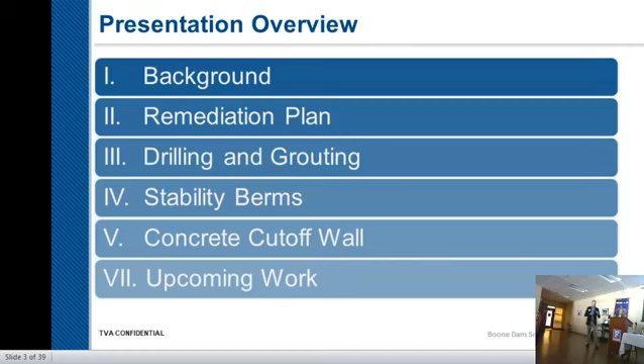Most people are familiar with the dam. We have a concrete and an earthen embankment section. The earthen embankment is about 750 feet long. The concrete section is about 850 feet long. The normal pool in the summer is 1,382 feet. The normal winter pool is 1,362 feet, and our tail race elevation is around 1,360 to 1,362, depending on when we're generating and how many units are running.

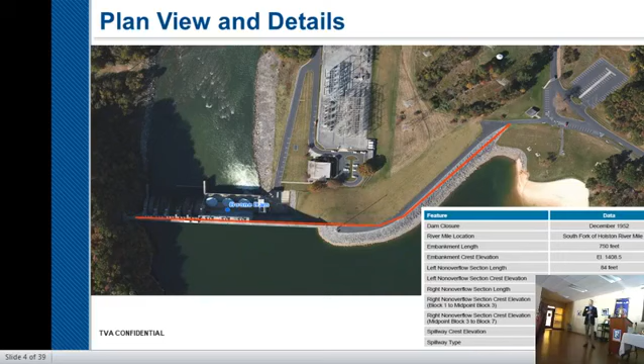So normally we have about 100 to 120 feet of head, 120 feet of water behind the dam that's impounded in the reservoir. It's a typical earthen embankment section. Our seepage issues that we're dealing with are with the embankment section. The concrete section is stable. We don't have any seepage issues over there.

This is a pretty typical embankment section for the time that this was designed and built. A lot of the Corps of Engineers facilities and other dam facilities were built with this same configuration at the same time. And as you are aware, the projects like Center Hill and Wolf Creek have been fighting the exact same issues that we are, and we're going to talk about that over the next couple of slides. The original designers of the dam understood what was going on at the dam, but this seepage and piping problem was not well understood in the industry. That's why you see it as a broad problem with dams these days.

It's the number two cause of dam failures worldwide. And when I say number two cause, it's only 0.1% less than overtopping of dams. So it's a significant issue in the industry.

So we have an earthen embankment section, and they understood that there were these pinnacles of bedrock underneath the dam that we're going to see in some of these pictures. But again, they didn't appreciate how that impacted the dam long term from a seepage and piping standpoint. They looked at it as more of a structural problem, and so we did a consolidation grouting program under the dam to essentially, in their mind, construct vertical columns to help support this load of the embankment.

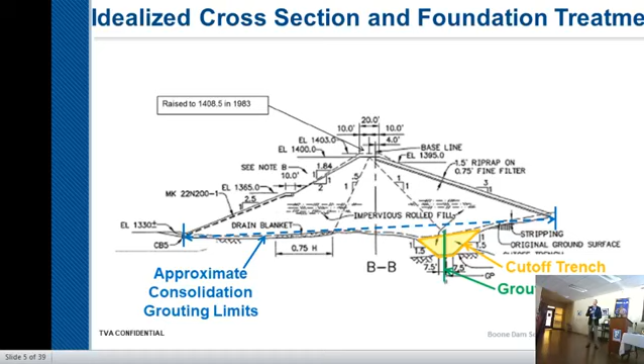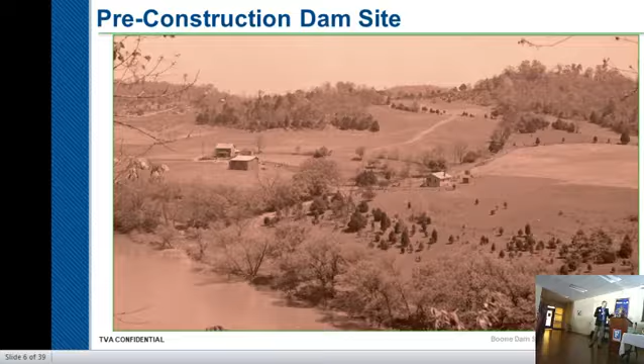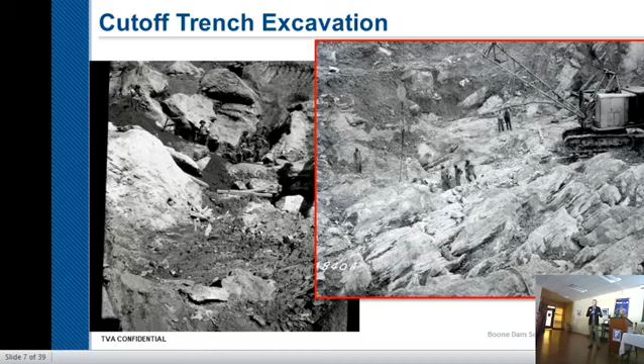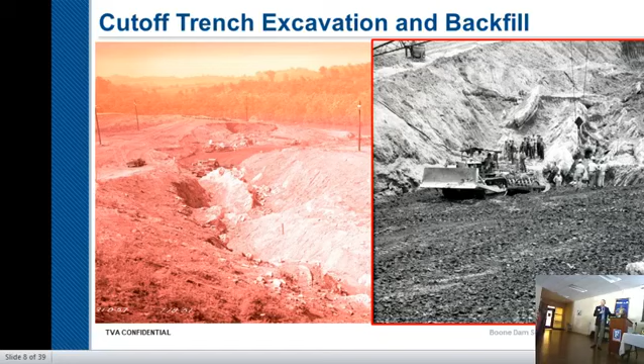This is a big pinnacle of rock. You can see back here in this part of the cutoff trench, they had gotten above those pinnacles and they're using equipment to compact material. But you can see as you come up the hill, we have these fins of rock still sticking out that they had to compact material around. And then here, you can see they're getting above the rock, so you're getting into normal construction practices, pretty much what you would see us doing today.

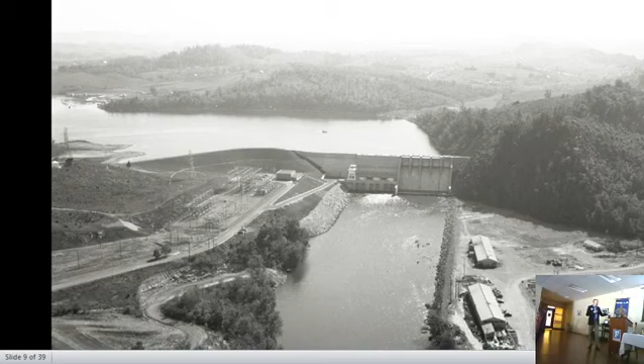So at the end, you can see we've got the lake impounded. You can still see some of the construction facilities, the switch yards in place, the control building, and the powerhouse. So you have the reservoir impounded behind the dam, and it's constantly trying to seep under the dam through that earthen cutoff trench. But remember that historic photograph, all those drainage swales, surface swales, used to come back this direction too. So not only do you have the seepage from the reservoir, you have the seepage from this high ground and these sinkholes up on the hills here that are also directed that direction.

As you can imagine, as we operated the reservoir over the last 62 years, we fluctuated it up and down. During the summer, water level in the lake is high, and everything wants to run downstream. Water level goes down in the wintertime, and a lot of that water from the lake still tries to run downstream, but a lot of the water up in this high ground also wants to run upstream under the dam. So you kind of have this shifting of the water back and forth as we operate the reservoir.

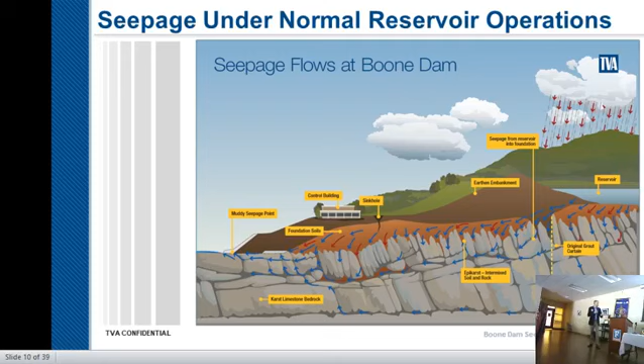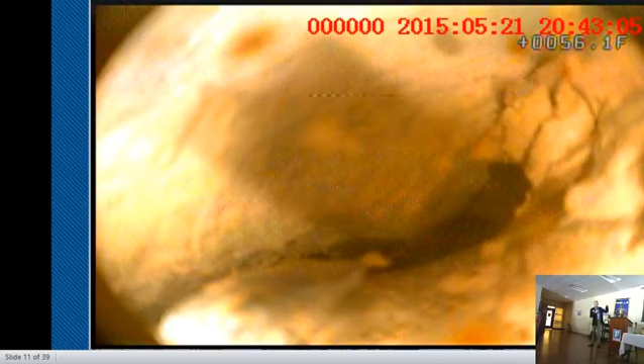This is actually a video from the abutment. It's not under the dam, but this is physically what's been occurring over 62 years. We drilled a hole, put a camera down on the ground, turned the camera sideways, and you can see water flowing, and those are pieces of soil. One piece of soil at a time.

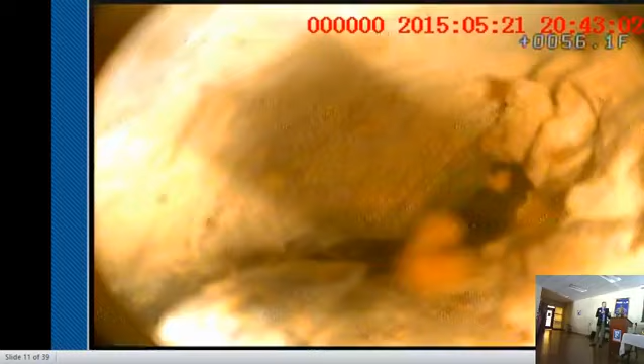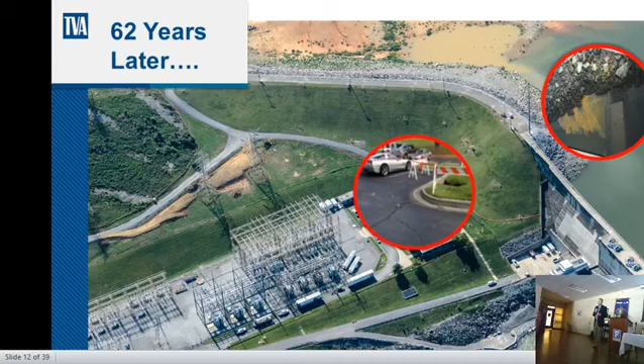So 62 years later, we have a sinkhole in the parking lot at the downstream toe of the dam, and you have muddy discharge in the tail race. Now sinkholes aren't common, but they're not uncommon at dams. Infrastructure fails all the time.

You'll have old toe drains, you'll have storm drainage. I've responded to probably 100 sinkholes in my career. 90 of them have been associated with storm drains that have failed over time. But when you get a combination of the sinkhole and the muddy discharge, it is an emergent situation. And that's why TVA made the prudent decision to lower the reservoir at the time, and as quickly as they did.

Here's some closer pictures to help you understand the scale. This hole doesn't look very big — it's about 5 feet this direction, 3 feet this direction. But over time, while that hole never got bigger, about a 40-foot diameter around it depressed. So that's part of the early work we did — coming in to do some grouting and create structural columns around that sinkhole to keep it from impacting the control building and other infrastructure.

Oh. I'm getting a little handsy here apparently.

For some scale, there's a man standing in the picture up there. His name's Tim Boring — he's about 6'6", 300 pounds. So to put things in scale, that's not a little muddy discharge.

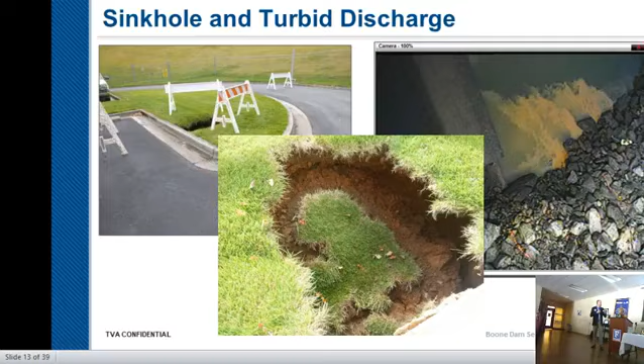As we've talked about in the past, our overall seepage remediation plan is to build a concrete cutoff wall, plus grouting and berms. The reason we built a concrete cutoff wall is you know what you built and where you built it — it's a positive cutoff, a permanent cutoff in terms of deterioration. You essentially turn the embankment portion of the dam into a concrete dam. From that point forward, the concrete barrier wall is the seepage barrier, and the embankment just serves to keep it stable.

Because of modern design standards and the potential for future sinkholes upstream and downstream of the dam, and because we can't impact the regional groundwater table, we've also added stability berms — rock berms upstream and downstream — designed to keep the dam stable. If we have sinkholes anywhere near the toe of the dam, they're designed to collapse in and choke them off. And then the grouting is to provide more of a positive cutoff below the wall.

So you say, well, why don't you just build a cutoff wall to the bottom and not worry about grouting? Well, a couple things. You have to slow the water down so that you can build the cutoff wall in the first place. And secondly, it's just more economical — it's cheaper and faster than excavating all that rock and backfilling it with concrete. So it's really trying to balance and optimize the depth of your wall, building it where you need it with some additional margin rather than building it full depth.

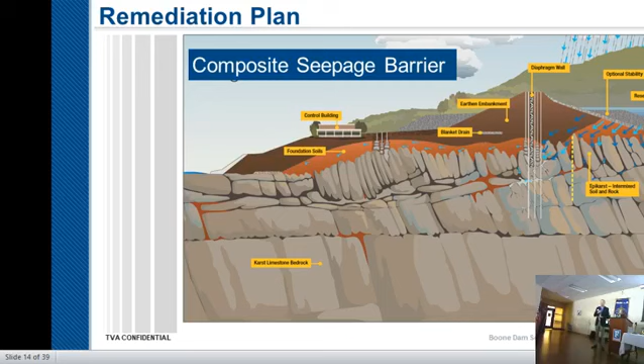So when I was here in November 2016, we were in the middle of our drilling and grouting program. There were two components. There was a low mobility grouting program, done in the upper part of the rock around these pinnacles — like injecting a brick mortar, something sandy, made of cement, water, and sand. It's made to push soft soils out of the way, fill larger voids and cavities, and displace the soft soils that are prone to erode. And then the high mobility program, injecting cement and water and other components that vary in thickness from milk to a milkshake, whose job is to penetrate the finer features in the rock and seal those up.

So we worked about 14 months, 24 hours a day, 6 days a week, through all the weather. The only thing that really shut us down was lightning. We took Christmas Day off, and the 4th of July and Memorial Day — major holidays — but other than that it was an around-the-clock operation, and Sundays were mostly for equipment maintenance.

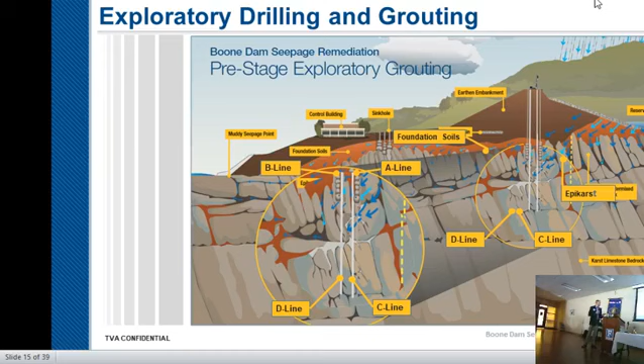In all, we drilled 539 low mobility grout holes, 276 high mobility grout holes, about 21 miles of drilling, and we put about 233 concrete trucks of grout into the ground below the dam.

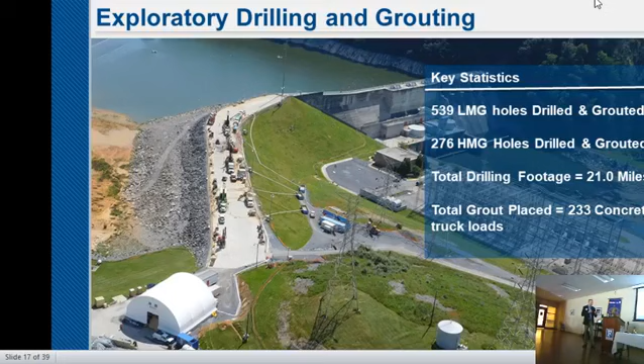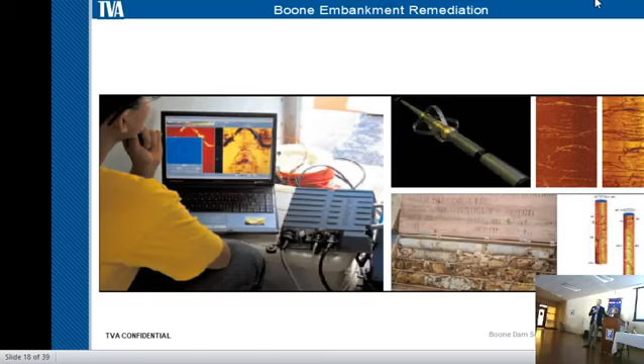Every one of those holes we drilled was as much about collecting data and optimizing the depth of this cutoff wall as it was about getting the grout in the ground to serve the other purposes. We made direct observations of the material we recovered from the holes. We took pictures down the hole, developed 3D images of all of those to understand the rock structure and tie what we are seeing below the ground to what we're seeing above the ground to the rock outcrops.

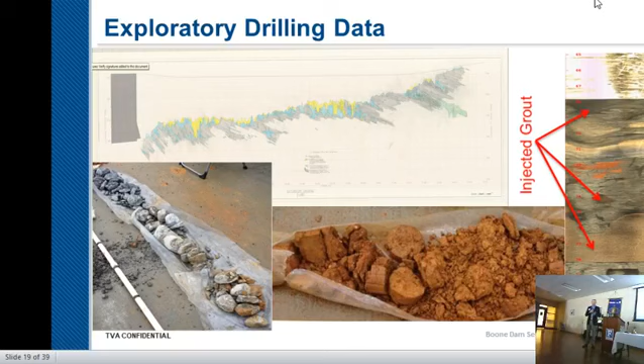You can't see it here, it's not showing up very well, but up on top, this is a hand plot of the geology. So we took every piece of data that we had, we plotted it by hand. We also used computers to help us sort through all of that and develop them and put them together.

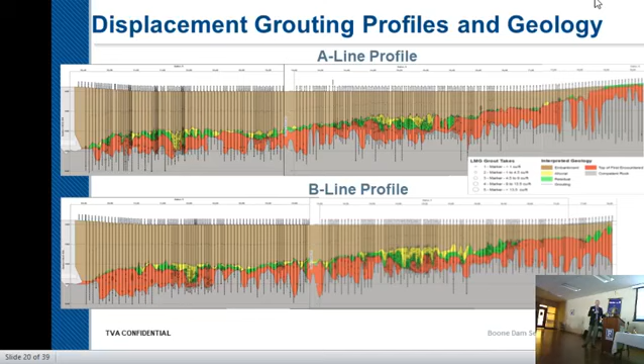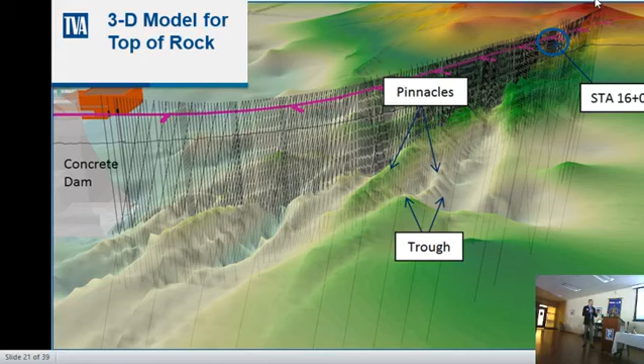So really we built a rock berm on the downstream side. This will also provide some room for the cutoff wall contractor to stage some equipment and some materials. And then on the upstream side, we built a larger rock berm. So the top width of our crest now is about 120 feet wide for most of the embankment. When we get into some pictures of the cutoff wall construction, you'll understand why. It's to help optimize their work and protect the workers.

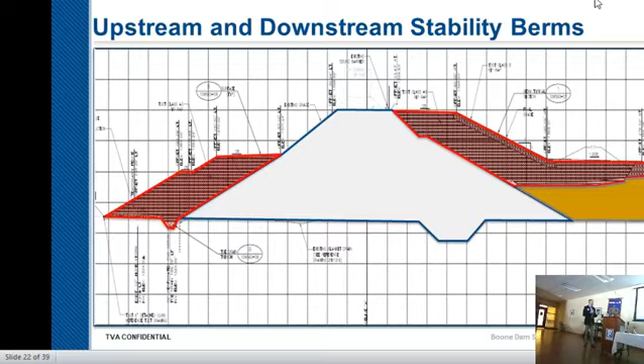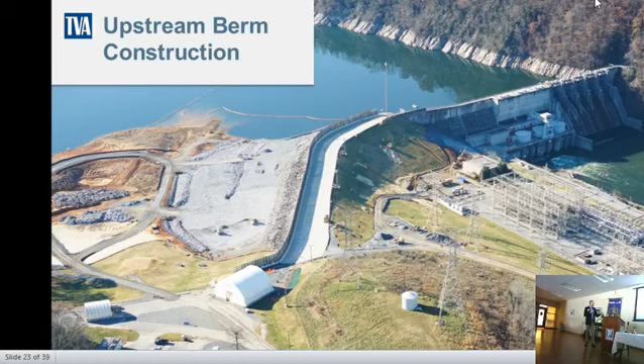This was the sound wall that you could see in some of our grouting pictures. So the original crest of the dam is just on the other side of this wall. You see we've widened the crest of the dam a lot. There was about 160,000 tons of rock placed on the upstream side.

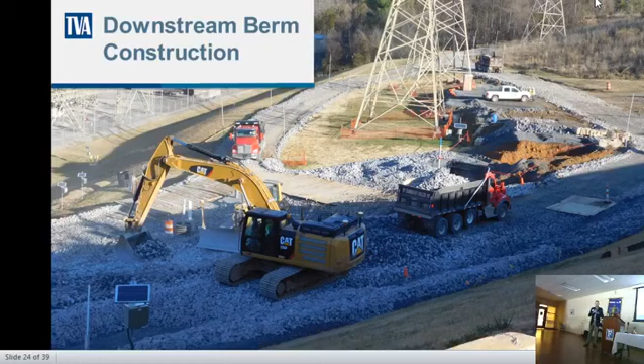On the downstream side, we built a graded filter, and here it is under construction back in the fall. This is what it looks like today. Here's the original crest of the dam. There's the sound wall we were just looking at.

Like I said, from here to the upstream side of what we showed in the other pictures is about 120 feet wide now. And on the downstream side is about 60,000 tons of rock. My math isn't down to the exact ton, but it was really about 223,000 tons of rock total.

So our cutoff wall. We grouted down here. May or may not do any more grouting as part of wall construction, depending on the means and methods of the contractors and what we see as we go. But our goal is to build the cutoff wall through this portion of the bedrock that we cannot grout effectively to serve as a positive cutoff of the seepage.

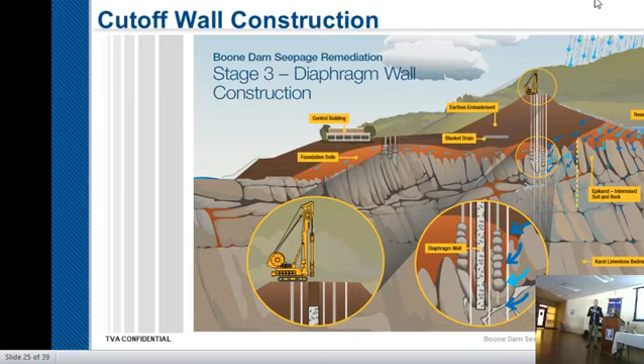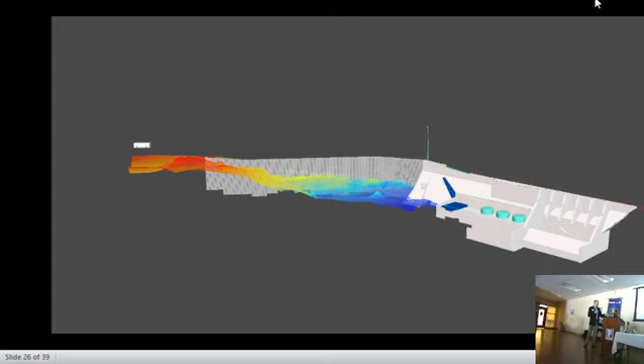So it sounds pretty simple. We want to build a wall that's 2 feet wide, up to 190 feet deep. So how do we actually do that? Well, we can't go out and just dig a ditch 190 feet deep and blast through the rock.

So it's very specialty equipment. There's contractors all over the world that can build cutoff walls. It's done every day for subway tunnels and stormwater tunnels and things like that. But very few people in the world have ever done it through a high hazard dam, just because the risks, the technical understanding of what you're doing, the focus on public safety, and tied to the efficiency of the work is just a different level than what you would normally do for some of those other projects.

We build this in discrete elements, and each element is a distinct piece of work. We build an element here, move over, build another element, then come back in between to build another one to tie them together. Essentially they consist of circular elements, just drilling big columns, or rectangular elements, or a combination of the two.

So we go in and drill a circular hole through the soil, through the bedrock, to the bottom of the cutoff wall. We move a few feet away and do it again, and again. Those are called primary elements. The second element is we come back between them and excavate all the soil between them and parts of those original primary elements to tie them together.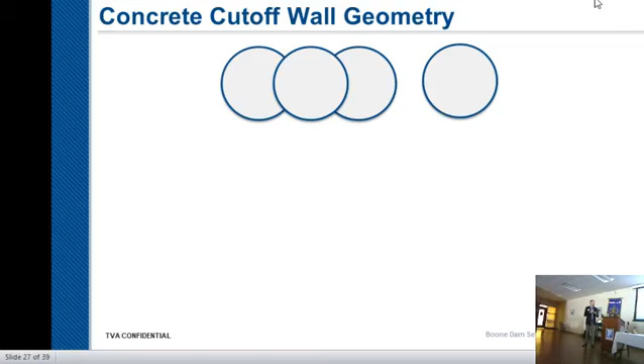We do that over and over, and construct a wall that at its minimum dimension is 2 feet thick. Different contractors will do it different ways, different size elements, different spacings, based on the risk, the geology, and the hardness of the rock.

Seems pretty simple in plan view, but when you're trying to do it in three dimensions, you're excavating hard rock where part of your cutter equipment is in rock, part in soil. As we try to penetrate these pinnacles, you're trying to maintain a tolerance for deflection so you can tie these together and construct a continuous wall. It's very tedious in nature.

Second method, we excavate rectangular panels. Let me back up a little bit. Those circular panels can be anywhere from 3 feet to 6 or 7 feet in diameter - they could be larger or smaller. It's really tailored to the nature of the work on your site.

These rectangular elements are generally on the order of 4 feet thick and 9 to 12 feet long. So again, we excavate one, pour it full of concrete, move a few feet away, excavate another, pour it full of concrete, then come back and tie the two together. Or a combination - primary elements are circular, secondary elements are rectangular. Our goal is to build this wall that's 2 feet thick, but the wall is going to be bigger than that just to ensure we get a minimum 2 feet thick, full depth, top to bottom, left to right.

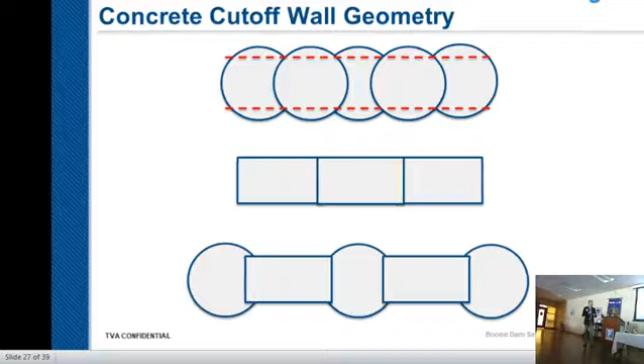So this is cutoff wall construction at Wolf Creek Dam. This is why the top of our dam is 120 feet wide now. Lots of large cranes, lots of large equipment, lots of manual checks that have to be made by people working around it.

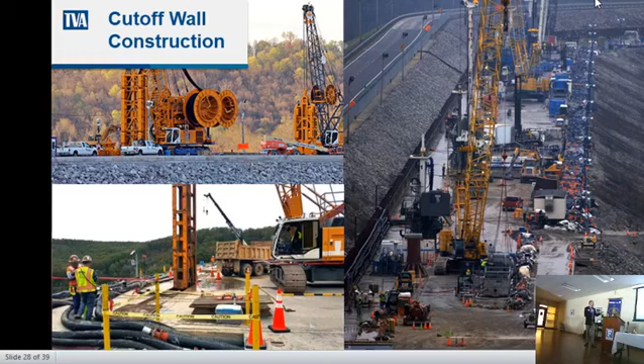This is Clearwater Dam in Missouri - they're excavating rectangular elements here. This is Center Hill Dam between Cookeville and Nashville, Tennessee - they're excavating rectangular elements there.

Zooming in a little bit more - this is a reverse circulation drill. It's essentially a tunnel boring machine that's turned vertical. It goes down through this casing and can cut pretty much any kind of rock out there. It's all a matter of gravity and the types of cutter heads they use. This is used to excavate the bedrock portion.

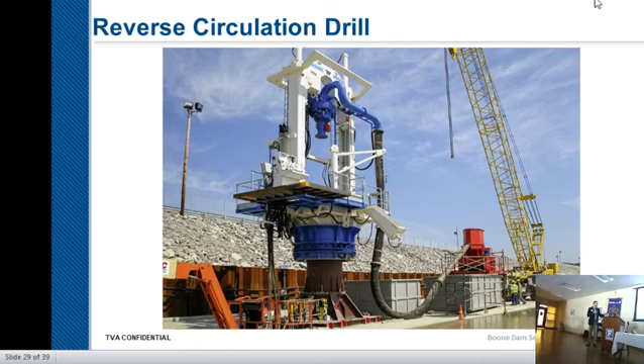This is a hydromill, or a cutter, or a hydrofraise. These are the pieces of equipment used to excavate the rectangular elements.

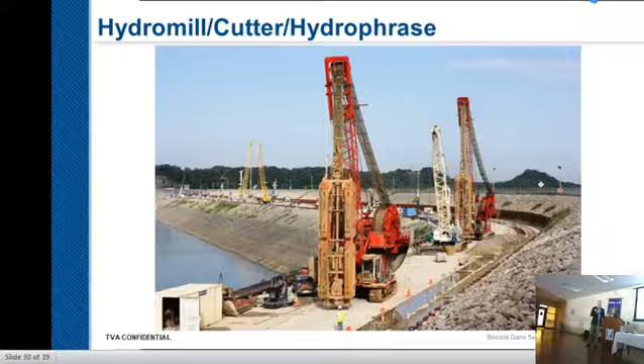Now the piece everybody wants to talk about - this is our schedule. We discovered the sinkhole back in October 2014 and lowered the reservoir shortly thereafter. We started grouting in December 2015, and grouted until February 2017. We've been constructing the berms, and this is where we are today.

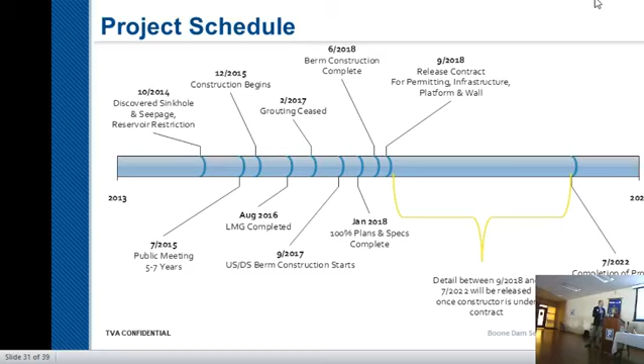Our best estimate, based on benchmark projects and working with experts in the industry, is that the cutoff wall and the testing that has to happen before we return the reservoir to normal operation will extend from this fall until mid-2022. So why the big time range? Seems pretty simple to build the wall, but it takes a lot of work to get to the point where you can build the wall.

This is essentially an industrial process. We have the width for the embankment built out there. The contractor's got to come in and build a work platform - a reinforced concrete structure to support their equipment and their means and methods, to maintain all their fluids, to serve as an environmental barrier, and to manage all the storm water and fluids that come out of their excavations.

We've got to build an on-site water and wastewater treatment plant to treat all those fluids, taking the slurries they use and cleaning and treating them for disposal off-site. We've got slurry production and cleaning facilities - as they drill and excavate these holes, slurry is the fluid used to stabilize the hole, keep it from collapsing, and carry those rock chips and soil cuttings up out of the hole through a processing system. It's cleaned out and reused, while all the waste has to be treated, dried out, and taken off-site.

We've got to build facilities to take those materials and dry them out so that you can do something with them, pack them in place, take them to the landfill, whatever we end up doing with them.

We have to customize an off-site batch plant. These are pretty highly specialized concrete mixes, similar to a drilled shaft concrete mix for deep placements. If you're familiar with high performance concrete, ours isn't quite as sophisticated, but it has to be a dedicated batch plant, dedicated to the contractor 24 hours a day, 7 days a week. So whether they team with a local supplier, or build their own on site, or build their own at an existing batch plant, that has to happen.

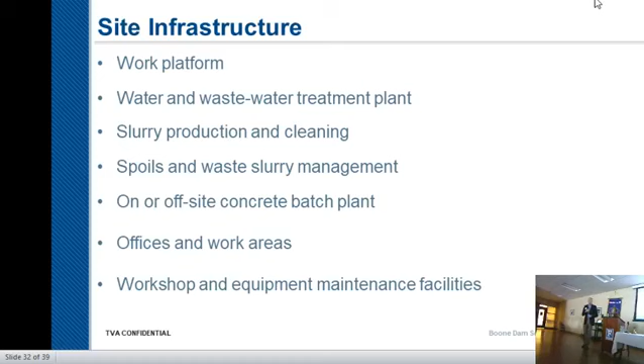So what are we going to be doing the rest of this year? If you go by the dam today, you'll see we're cutting down the hillside behind our communications trailer. In communicating with the contractors during our procurement process, we got to see in general how they are going to use the site, so we're trying to get ahead of them and prepare areas for their use, so that we can cut that out of their schedule once we're able to sign a contract.

We're going to be installing additional instruments and automation equipment to monitor for dam safety during construction. There's a communications tower on the dam right now that supports part of our operations, and that's got to come down this summer.

Where we're tying into the concrete dam is immediately adjacent to our foundation gallery. So we've got to bulkhead part of that off and pour it full of concrete, so that when we cut in and tie in with the cutoff wall, we don't damage the gallery.

And then as we move forward through the procurement process and figure out what other things the contractor is going to be doing, we're going to start doing those ahead of us having that contract in place, so we can accelerate the schedule as much as we can and be ready as soon as possible for them to start productive work. Then this fall, once we select a contractor, they'll start their own engineering for their utilities, power, water, other infrastructure, and the environmental permitting they have to do.

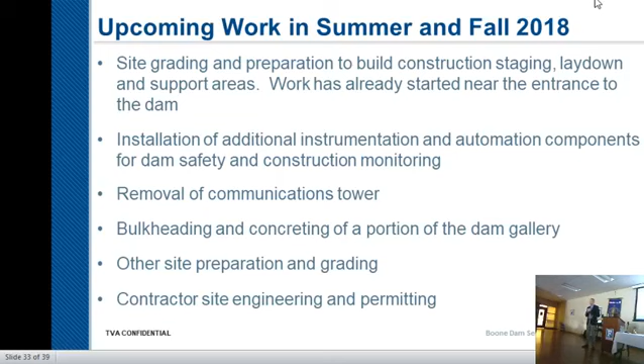Dam safety is always our priority. The protection of the people downstream, protection of our workers, and quality — those are our focus areas. We keep all those right, everything else falls into place. Dam safety is always our number one priority.

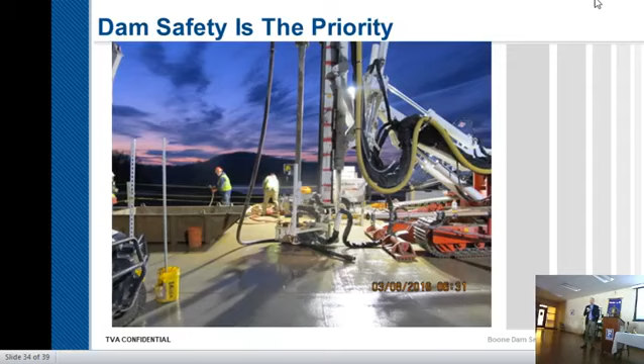You said that because of the sinkhole and the yellow blow off that you were in an emergency situation. What would have happened if nothing were done? And particularly to the dam, what sort of time frame would that take place?

It's a potential emergency situation, and in the dam safety world, you never know if that condition is actually going to develop into a dam safety situation. There's not an exact science or exact answer to your question. The sinkhole could have continued to progress and start impacting the dam. That could happen in a matter of minutes or hours.

So I'd encourage everybody to go look up Teton Dam on YouTube. They had flow through the abutment — it wasn't underneath the dam, it was actually through the hillside where they tied in. One afternoon they had a wet spot on the ground; by noon the next day, it failed and killed 11 people.

So when you see those things, there's not an exact science to calculate it. It's at a point where every hour you delay making a decision, the risk goes up exponentially.

And really, the only way to start impacting it is to start lowering the reservoir and start filling in the sinkhole.